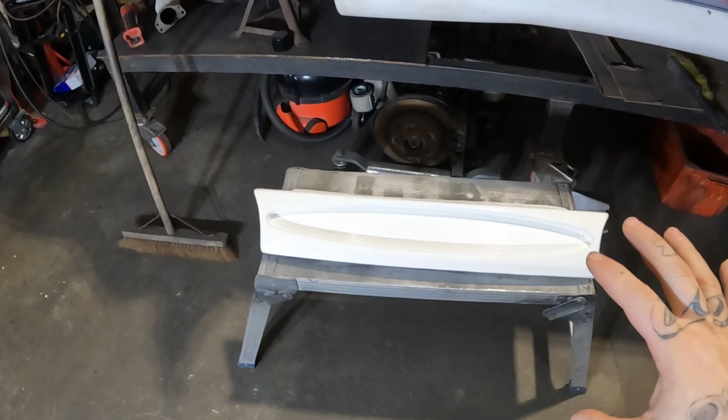But however, this episode isn't about that. This is about me trying to turn all of this into a rotisserie rollover jig. Have I ever built one of these before? Nope. But am I going to try? I certainly bloody am. Now I could just go for the simple approach and basically copy this one, but that would be too easy. So I figured, why not make my own thing and just start from scratch, rather than copying someone else's thing.

So the plan of action is to build something like that. So we've got our main upright, that will have a tube welded to the top of it, which in turn will have another tube passing through the centre of it, which will then have a jig very much like this, which will bolt to the car, thus giving us the ability to roll the car over.

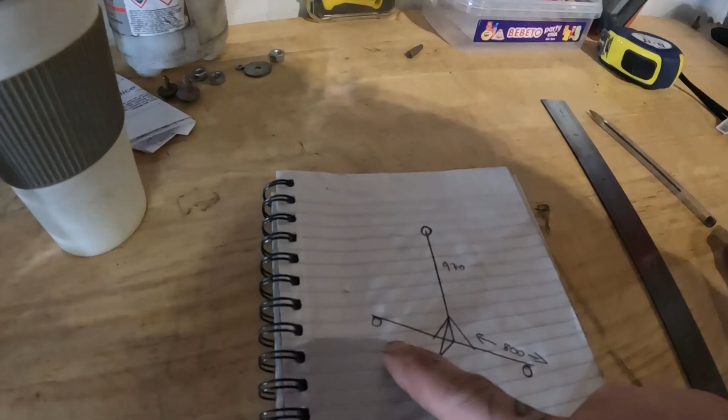And then on the bottom we'll have a straight bit of box section going that way, a straight bit of box section going out in towards the car, and then at some point I need to put casters on it as well so I can roll it around, and then obviously chuck a bit of bracing in just so this doesn't want to fall over and what have you. But yeah, once we've done that, we can then roll this car over and see the true extent of the rot on this thing.

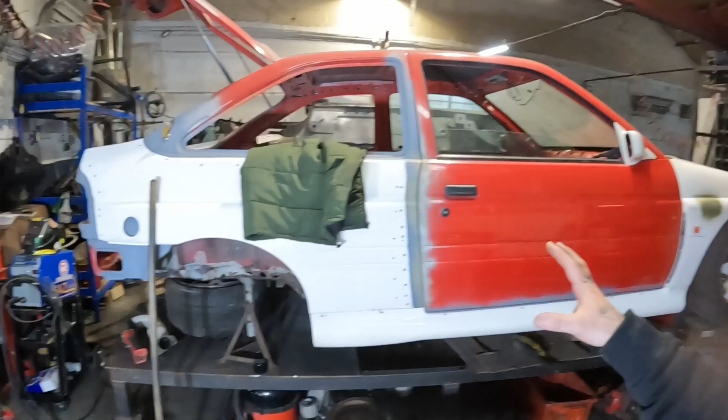Now if you're new to the channel and wanting to watch a geezer build a rollover jig has brought you here, this is my RS2000. I bought this thing sight unseen off the internet, usual story, and it's turned out to be an absolute turd of a car. So we've already attacked a hell of a lot on this rust wise, but I need to get this thing rolled over so we can assess the bottom of it before I decide whether or not I'm going to tube chassis it, because there's a lot of money and time involved in doing a tube chassis on a car. So I need to see exactly what's going on with the bottom of this thing.

So yeah, we've got all of this scrap metal down here, offcuts of random shapes and sizes, and hopefully we can make something out of all of this. And then we've got a bit of 2mm plate over here, which I'm going to make a circle with, loads of holes in it, and then we can put a pin through that to hold the car at various angles like my other car is currently. So yeah, stay tuned. Hopefully this won't end in tears with my car being on the floor where my rollover jig hasn't worked and it's just fallen over, but we shall see. Let's go on with it.

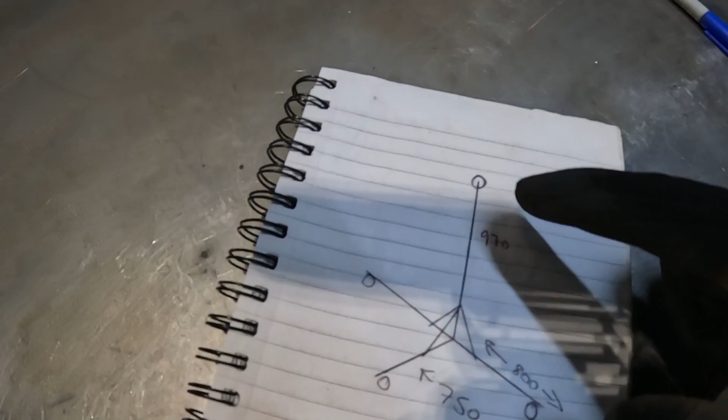Step one of the master plan then, folks. Now this upright bit I have already got done, and it's already been notched for the tube to sit in it, so I don't need to worry about that. That is 970 from the bottom of this piece to the centre of where the tube's going to lie, virtually. So what we need to do now is cut this piece to go across here. I'm making that 800 because I've got this one here and that only measures in at 850, and I've never had any issues with the car seeming like it wants to fall over as you're trying to tip it. So I think 800 is more than adequate for that.

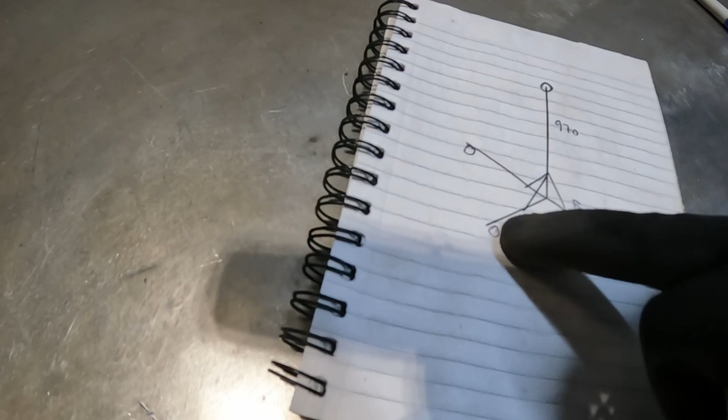And then the bit going out towards the inside of the car, so the bit that comes from there and goes under the car, is going to be 750. Now I have got plans to have a tube going from this side to the other side, so it will hold the two jigs together basically, stop them wanting to fall apart. So we've got our bits of metal here, we'll measure them out, get the saw out from down there, and we'll get to cutting.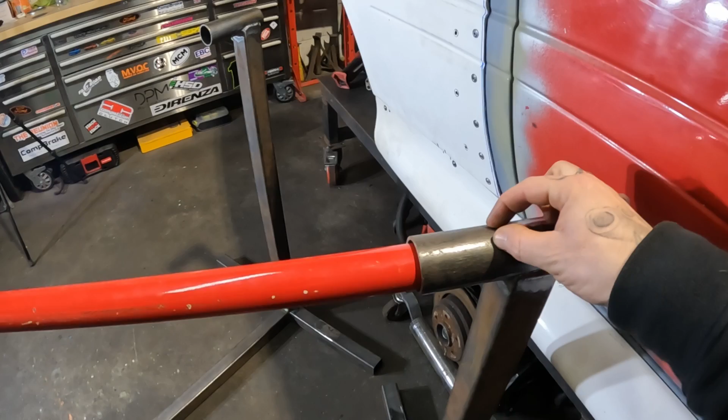Just to show you what I was on about earlier, what we're going to do is basically chuck a slightly smaller diameter pipe through that main pipe, and then the plan is I'm going to drill a couple of holes in this main tube, weld a couple of nuts to that, and then we will bolt through that to pinch on this pipe, which will then stop it wanting to turn and yada yada yada.

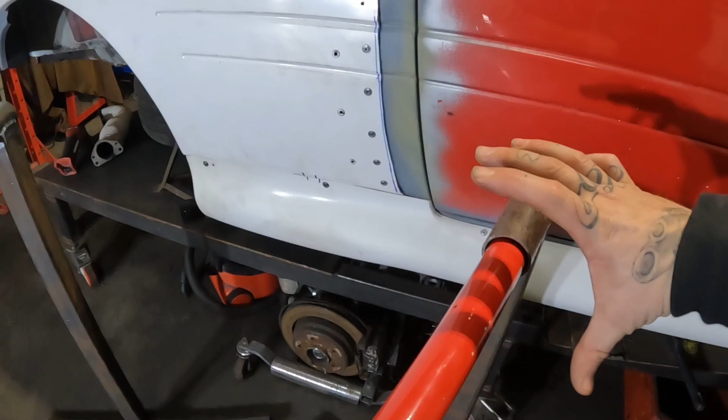But what we're also going to do is cut a big 6-inch diameter round plate, and then we're going to drill multiple holes around that plate, so when we put a bolt on the side of here, we can then push it through one of said many multiple holes, which will also work towards helping that stay in the position that you want your car in, whether that be 90 degree, 45 degree, blah blah blah. But that is a little bit later down the line.

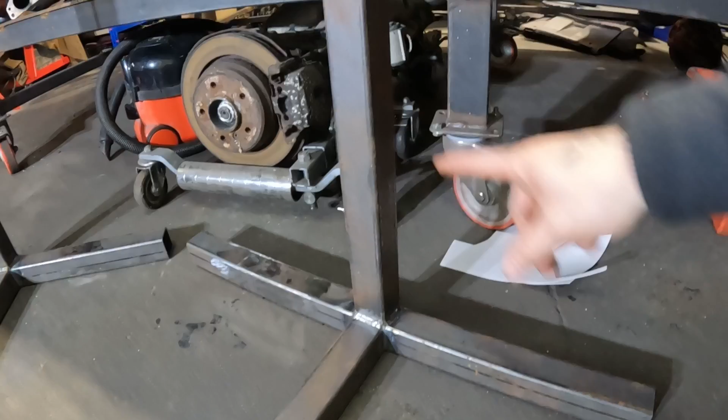What we need to do tomorrow, because it is getting on a bit now and I don't like welding in the workshop too late, is we're going to put a brace in from here to here, just to stop that wanting to twist and whatnot. And then we're going to chuck in a couple of diagonals on here, so we'll go from this main upright to here, again from there to there, and the same again on that side, and do all the same again on that other one. And we will be using some 40 by 40 with a 2mm wall, so that'll be plenty strong enough for that. It'll triangulate everything down there and job is good.

So yeah, stay tuned. I'll pick you guys back up tomorrow when we're ready to crack on with that, and then it'll just be a case of making something to fix from that to the car, and then it'll be the moment of truth, and hopefully my car won't fall over.

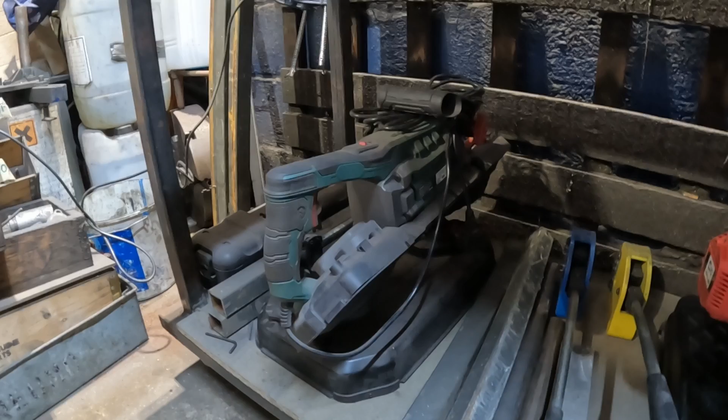That is the bracing all done and cut out. Now this little Parkside saw thing, whatever you want to call it, is absolutely brilliant. Cannot fault it, apart from when you need to try and cut a 45 on one of them and it doesn't quite like it, so we had to bust out the big guns. Thankfully I bought this a couple of years ago to use for actually building my welding table, so that's quite handy. But we're there, we're all cut out, we're all ready to go now.

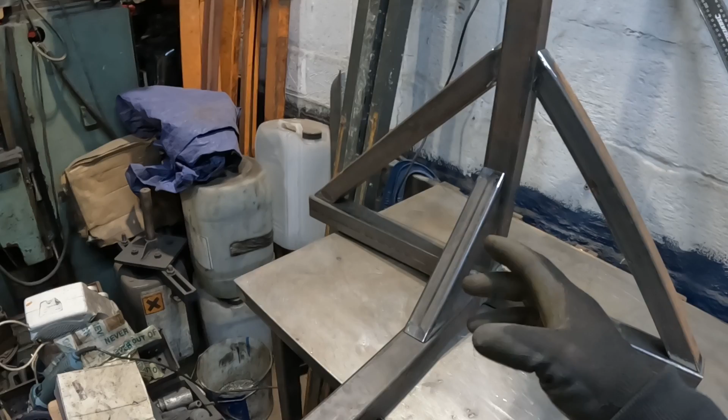As you'll notice, the piece I've got from the main upright to the piece that's going to go underneath the car, I have cut quite a bit shorter. Now that is because I'm worried that when I go to spin the car, if I had a longer piece in, the car might hit it. So I've made that quite a bit shorter. It'll still brace it, it'll still hold it, so that's fine and dandy. But yeah, that's all of that.

And then we've got a couple of smaller pieces. I do still need to notch these ever so slightly to fit around the tube a bit better. But that will go up in there like that, and then that will brace that tube. So everything's going to be braced, everything's going to be supported in some way, shape or form. What we need to do now is fire up the welder, tack that in place, and then fully weld it in place, and then we're good to go. Move on to the next phase.

But what I've also done is I went to Homebase earlier and bought one of these furniture dolly things, because it actually worked out cheaper to buy one of these built like this than buying 4 separate caster wheels. I could only buy the one because they only had one in stock today, but I'll go back tomorrow and get another one, and then I should have all the wheels that I need to get this thing rolling. So weld up, let's get cracking.

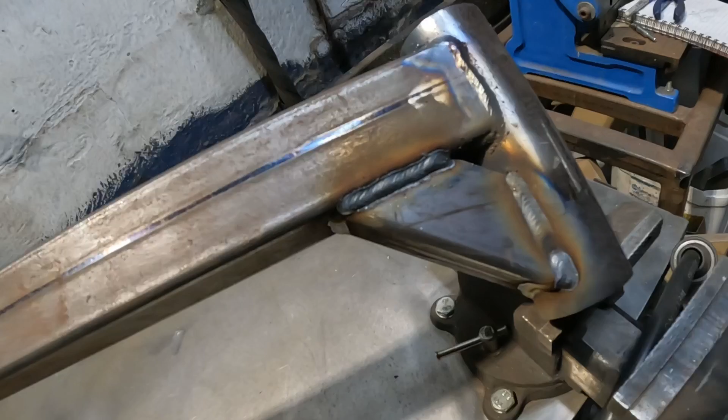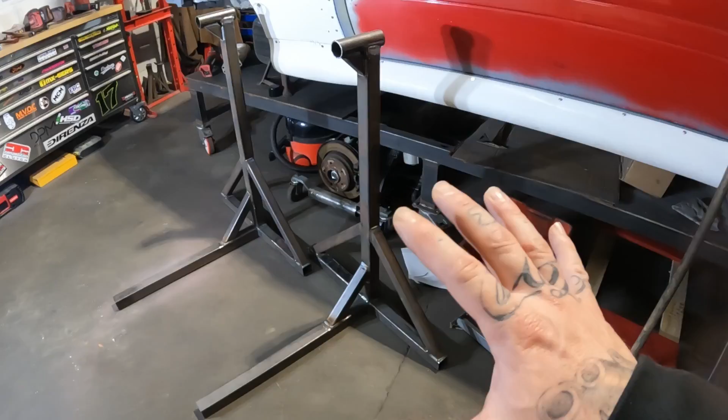That's the frames fully braced out now, fully welded and all that stuff. So they're pretty much done at this point, with the exception of welding on a couple of nuts to the top and then some sort of latch mechanism, if you like, for one of these. And then of course putting the wheels on, which are down there. But for the most part, that is done. What we need to work on now is that support bar that goes up there.

So there's a tube that's welded to that, which goes through and into that tube. So we need a tube coming out of there, a big bar going across, which I'm gonna probably do at about 1.2 meters, just so it's more or less the width of the car. And then from that, we will then work off to get onto the car. So that is the plan.

Let me just go and get some metal drawn out across the table, and then I'll show you exactly what I mean, because that might not have made any sense whatsoever. So let's get my box section down on the bench, we'll mark it all out, cut some of that to length, and then I'll pick you back up when I'm ready to show you what I'm on about.

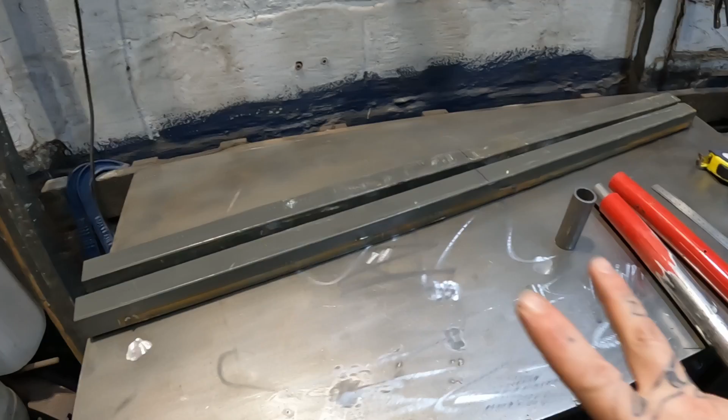Alrighty then, we have got some bits cut out, folks. Those are my 2 bits of 40 by 40 box section that I've cut to 1200mm. I've marked 600 centres because I need to drill a hole through here, which will then have that pass through at some point. What we need to do is weld those 2 bits to the bigger red bits. The reason being is that I can't hole saw the red bit through the 40 by 40 because there'll literally be no meat left on the 40 by 40.

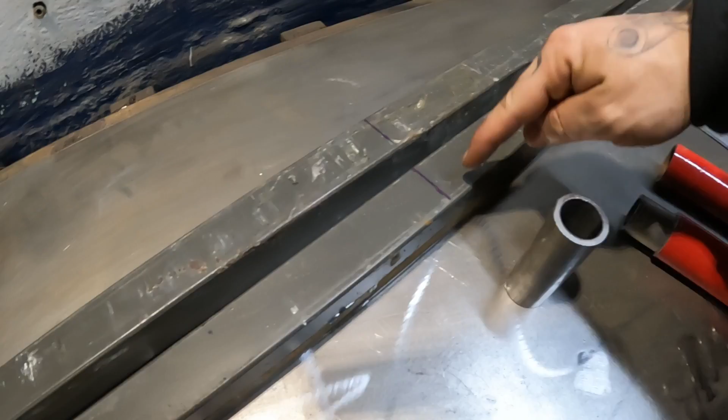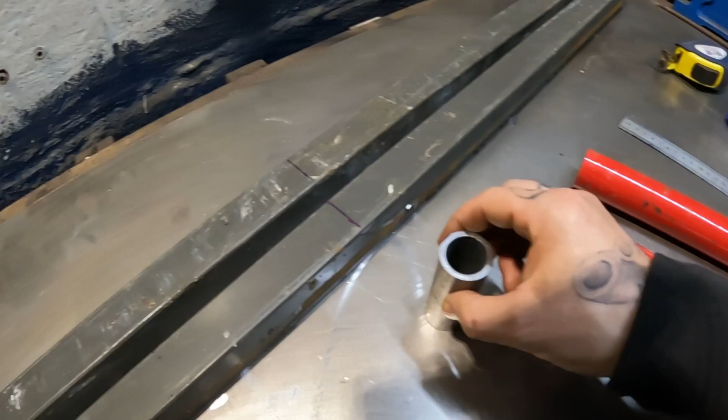So we'll drill a smaller hole, we'll weld these 2 bits to the red bits, pass them through, weld the underside, and then also weld round the red bit to this as well. So it'll be fully welded both sides, and that'll be fully secure into the other tube. So that's my thinking. Hopefully that will work. In my head that's going to work perfectly fine, but we shall see. So I'll get my little pillar drill thing made up on here, we'll get everything sorted out, and then we'll start drilling some holes and then start welding some stuff together.

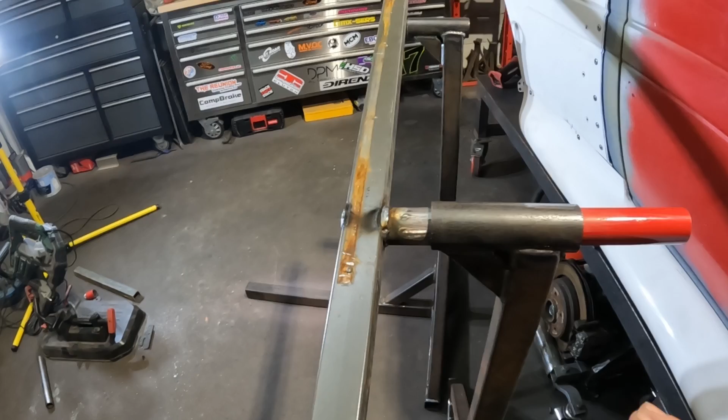Well, I'm going to go as far as saying that has come out pretty bloody spot on. Happy with that. However, the next one isn't going to be as plain sailing. As I explained earlier, I need to make a big circle with multiple holes all the way around it. So once I fix a pin to here, I've got somewhere for that pin to slot in and hold this in whatever angle I've desired at that given moment in time.

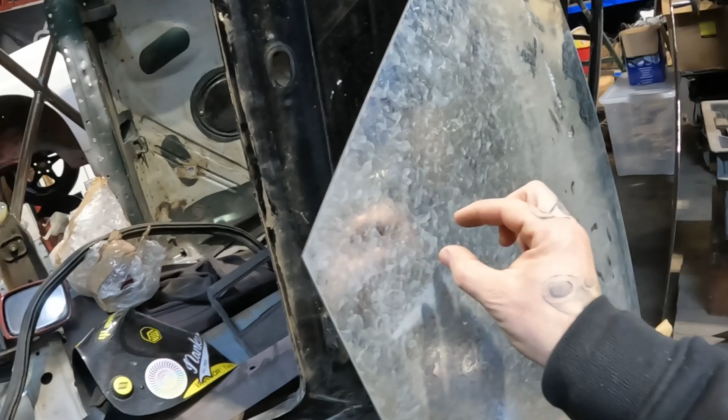So, what we need to do is head back to the bench, and I think we've got some, it's either 2 or 3 mil galv still. It's not ideal, but I'm trying to do this thing on the cheap, and that is free, so we might as well use it. So yeah, as I explained earlier, we need to do a big 6-inch circle, 30 mil hole through the centre so it slots over our bit of pipe, and then multiple holes all the way around it for the pin to go through. And then we shall weld it to this, slide it through there, weld it to that as well, and again weld the back end where this protrudes past.

So all in all, it's going pretty well, and so far it's cost me absolutely sod all other than, well, MIG wire and a bit of gas. So happy days so far.

Right, I'm gonna have a quick coffee break because I feel like I deserve one, and I'll pick you guys back up in a minute.

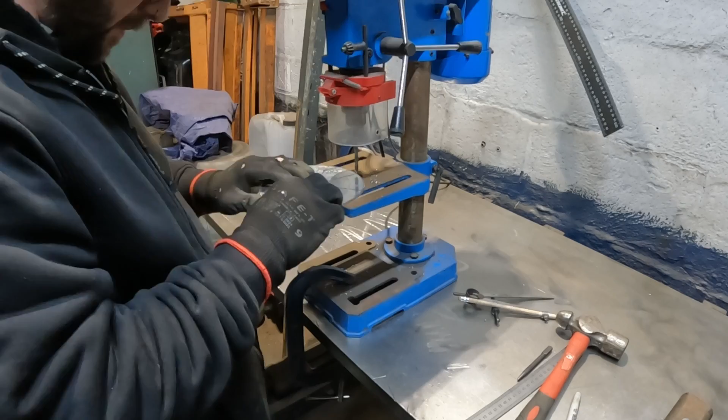Well, that probably took a couple of minutes at most for you guys, but for me that took an absolute lifetime. It's actually quite difficult trying to cut a circle out of steel and then shaping it and then drilling it and blah blah blah. So that is done. All the holes are drilled. I have left myself scope for drilling extras should I need to in the future.

So that is that. What I've also done is drilled a couple of extra holes in the box section, because obviously when you lay this over that, like so, 2 of the holes would have been covered up by the box. So I've drilled them out, so that's all happy days. So now what we need to do is pop that bit through there, like that.

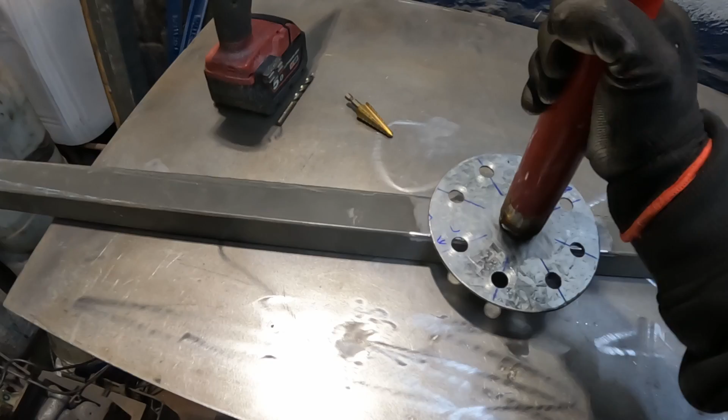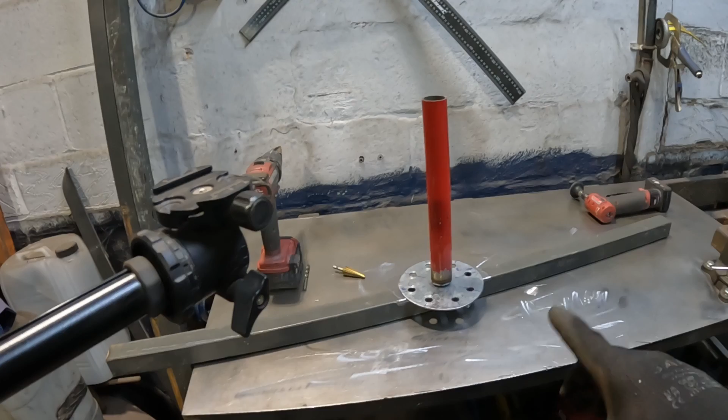So now that's in there, what we need to do is weld the tube to the plate to the box, and then we need to weld the underside of the tube to the box as well. And then in theory that should be decently strong then, and hopefully we shouldn't have any issues. So let's put you back on the tripod. We'll bust the welder back out, weld all this together, and then we can move on to the next bit, fixing the car to it.

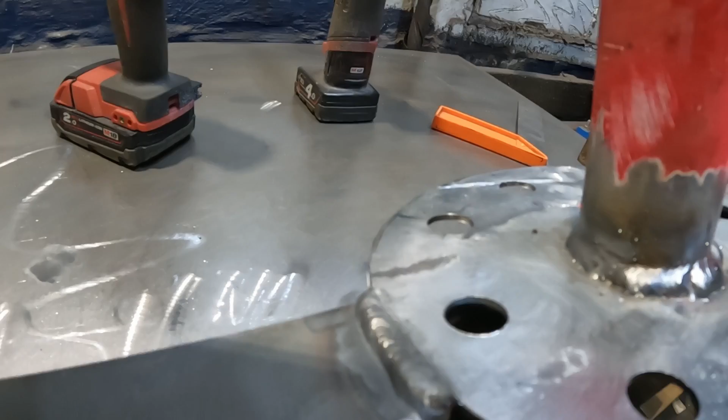That was my first time welding galv, and I was completely unaware that it's not very nice to weld. These bits came out alright because I tuned in my settings a little bit, but when I started on the tube, I mean look at the state of that. I ended up having to lay a huge slug of a weld around that bad boy. But like I say, once I tuned in my settings, the rest of it all went pretty well.

But the amount of white powder that's come off of that is absolutely everywhere. Probably a bit toxic though, really, isn't it? I should have worn a mask, really. Oh, right, let's go and put this in the jig. And what I meant by car was jig. Look at that. Happy, happy days.

So like I say, I need to put something on the side here to then have a pin to go through and through into them holes. So I'll have to work on that at some point. Also need to weld the nuts on there to put some pinch bolts through. But yeah man, that's looking pretty good. Pretty stoked with that, to be honest.

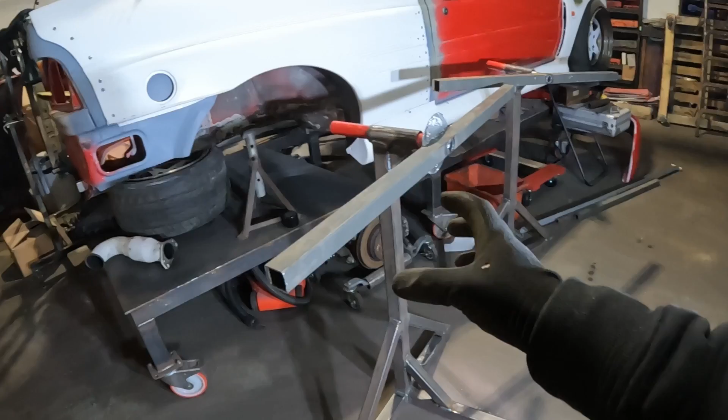So yeah, we'll get onto that next. We'll sort them out, sort the mount out for the pin or bolt, which is what I'm going to use. And then we'll move on to making the structure that will go from this to the car. But that is a job for another day because it's super late and I'm going to go home. So I'll pick you guys up next time back down there.

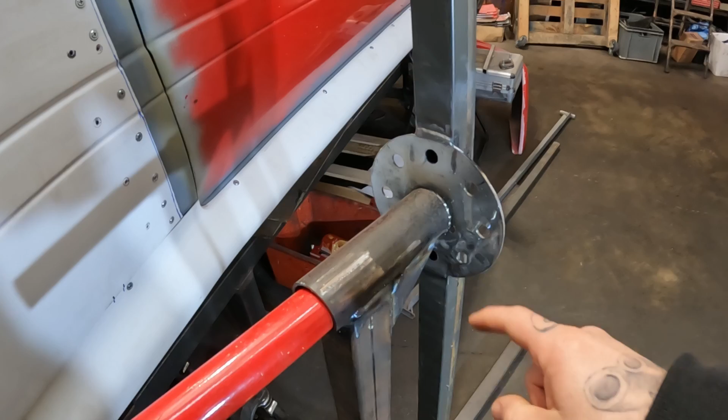Okay then folks, so next on the agenda is going to be making my sort of locking mechanism, if you like, which is going to consist of one of those going on there. Obviously where I'll put that little mark there, that will be a hole for a bolt to go through, so that one will go there, and then we've got another one to go on there.

So we'll go over to the bench, we'll start cutting this out. I've got some like 2 or 3 mil plate I think to cut these out of, so it should be sturdy enough. So yeah, let's get over to the bench, cut them out, and then we'll get them welded on, and then we'll move on to the next phase.

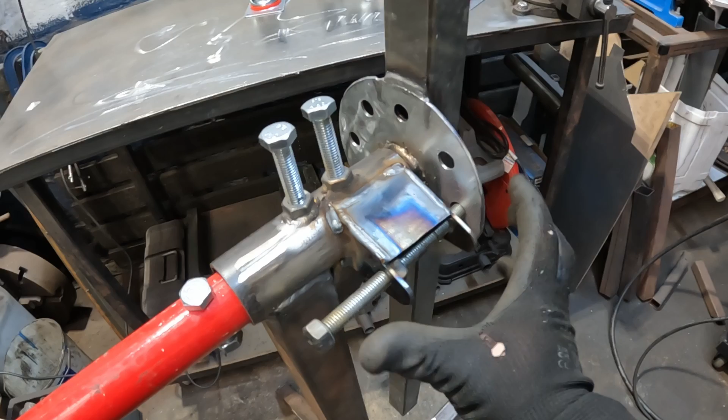So this is all fully done. I've now put a brace on here as well, just to stop these wanting to splay apart. Not that I think they would have anyway. And then as you can see, managed to get both my bolts in the top, and not very well lined up. But that is just there to serve a purpose and pinch this pipe, so I'm not really fussed about the looks. Another bolt through here just to stop this wanting to go through that way and fall out.

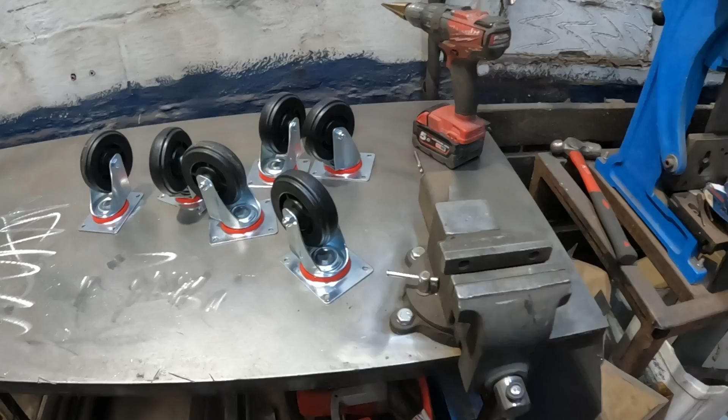And then with this bit here, as you can see, just wind it up, get it through the hole, and then that also just stops it from wanting to turn over on its own if these aren't fully clamped down. So yeah, next step is going to be welding these caster wheels on so we can move this thing around easily. So I've got one for each end. We'll get all them welded in, and then we can move on to finally making the structure that's going to bolt to the car.

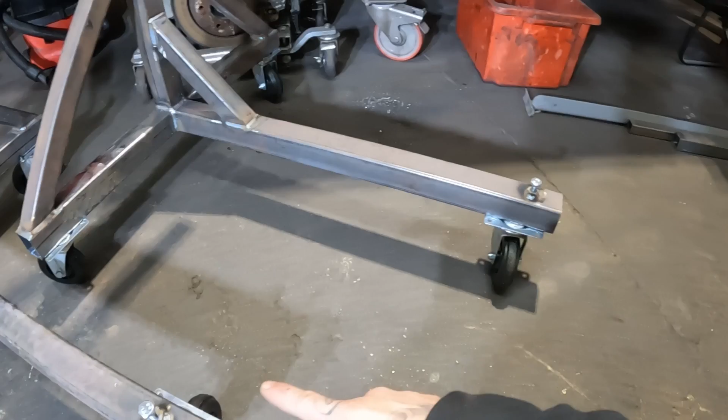And there we have it, two fully movable rollover jig ends. Look at that. I'll knock the other side out off camera. I didn't see the point in showing you me welding all that up. But what I have done also off camera is just welded in a couple of nuts on each leg, so when I've got the steel tube going in there to join the two together, I can pinch it tight and then I know they're not going to separate.

Welded a nut on here with a bolt in it, again to stop this wanting to turn around, and put a nut and bolt through there to stop it wanting to fall out. But that is as far as we can go with that for now, because the next step is going to be making the jig ends that go on that and attach to the car. But what I want to do is get this grille fitted in the car first, because once I've got that bumper off and a bit of framework attached to the car, I'm not going to be able to get the bumper back on and see how all this looks.

So what we need to do is get that in there. However, we need to do some trimming. So we need to trim the bumper on each end there and there, and we're probably going to have to take out a bit of the actual car slam panel there as well, just so that this can nestle right down and go where it needs to go. So let's get some tools out, we'll start trimming that down, and then once we've done that, we can move on to making the frame to attach this to that, and hopefully get this car off the table, flip it over and see what other rust we've got underneath it. I'm dreading it, absolutely dreading it. Right, let's get some tools on the go.

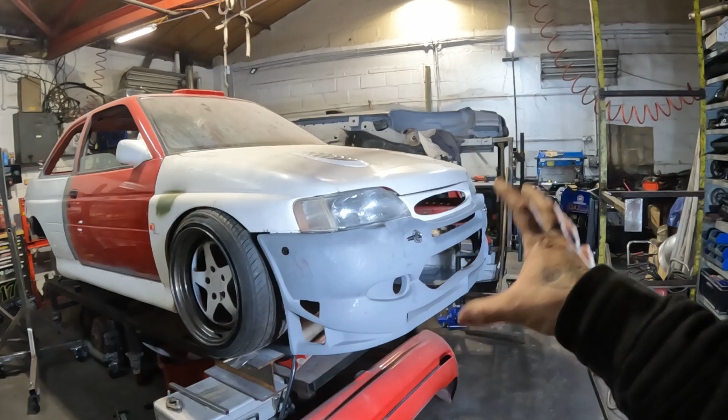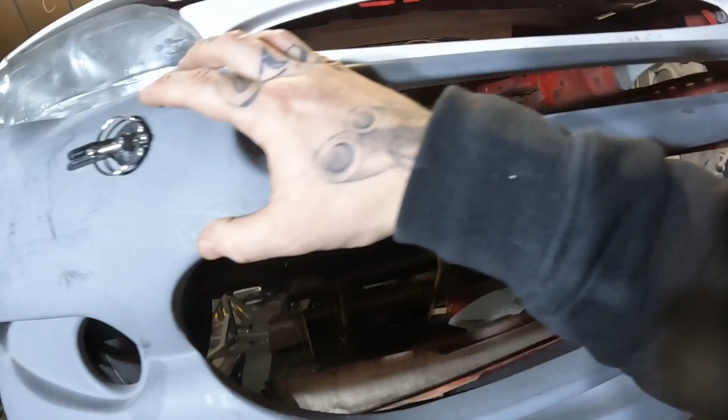But right, leave it with me. I'm going to take all this back off, and then what we're going to do is start making the structure to go from that to the rotisserie, which is going to be using some of this 2mm plate I have here. I'm going to go off the mounting point here and here, and then I'll show you what I'm on about when we get there. So give me a minute, I'll peel all this off. And just like that, it's back to looking sorry for itself again. Oh no. Right, what's the plan of attack then?

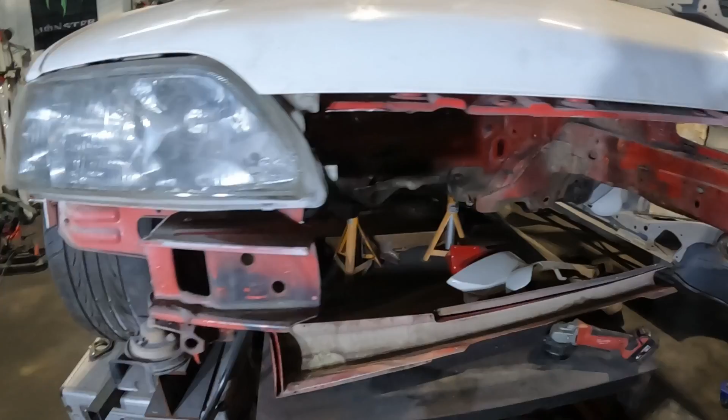So we've got some plate down here. This is about 3mm thick. So what we're going to do is cut a section out to go in here and protrude over slightly. Same again that side, and we'll bolt that in place. And then what we'll do is cut a bit of this to go between the two ends. And then that will fully brace the front of the car together, and then we'll weld another bit of 40x40 off the side of this, aiming upwards, which will then attach to the jig.

And it's going to be very much the same deal for the back as well. So we'll make a couple of plates for the back, put a brace across, just like so, and then that way all we've got to do is run a couple of chutes upwards off of that to pick up on the jig. So yeah, right, let's measure some stuff out, we'll get some cutting done and weld some stuff together again.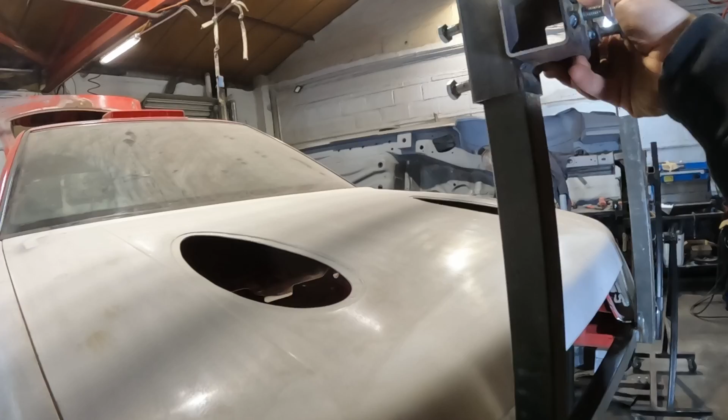So this goes on here like so, a couple of bolts in that one to act as pinch bolts, and then this piece is obviously going on the horizontal, which will pick up on that side, which is down there somewhere, and then again pinch them up, and then this in theory is completely height adjustable and side to side adjustable, so we should be able to get the pivot absolutely perfect. But that is now done for the front, so what we need to do is move on to the back.

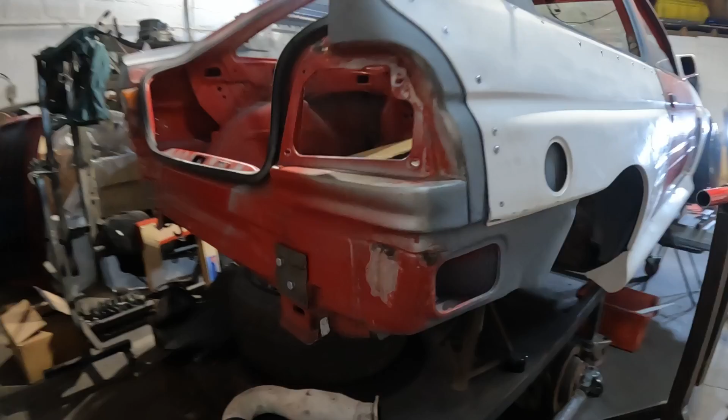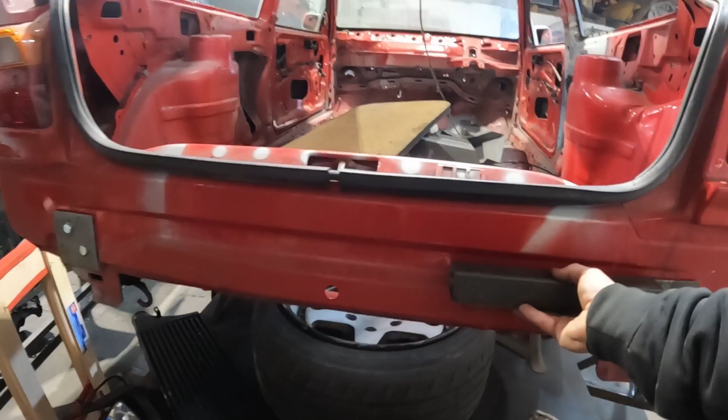So I have already been ahead and cut out some plates, got them bolted to the car. This side I can't do a bar straight across like I did on the other side, because I need to come out a little bit. So plan of action is to cut off maybe 3 inches or so of box, weld that to the plate, and then weld a bar to the end of that, go straight across, pick up on the other side, and then we'll have some uprights on that as well, so we can do the same deal as what we've done on the front and make everything quite adjustable. And then they will obviously go straight on them, and we should be good.

So hopefully we should be able to get the pivot absolutely spot on and stop it being top or bottom heavy. That's the plan at least. Hopefully it'll work out. It was a bit of a challenge trying to get the other car to pivot right, but yeah, that is that. But it is now super late, it's super cold, so I'm going to put you guys down for tonight, and I'll pick you back up tomorrow when I'm ready to crack on and get the back bit done.

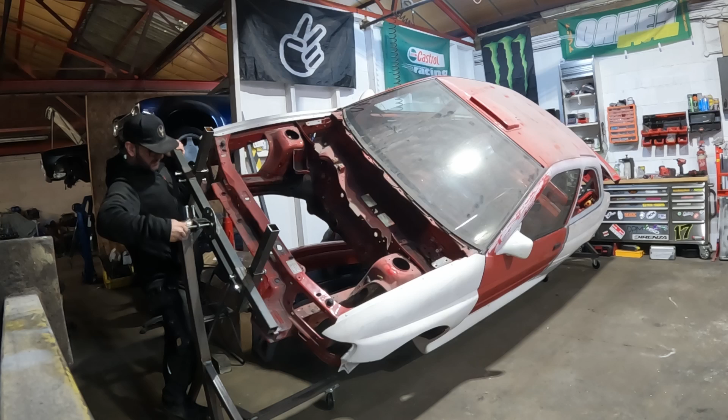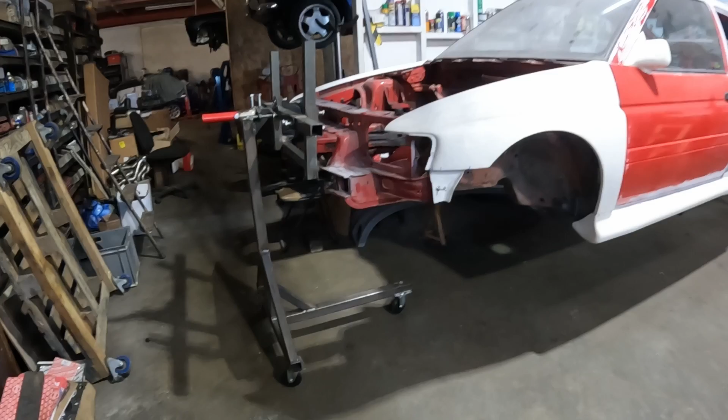Bar on there, folks, and it hasn't fallen off. I'm made up with that. It is so solid, so solid. But I won't lie to you, I was nervous as you like putting this on there. I mean, I was nervous when I put this car on this rotisserie, but knowing that I'd built this one, a whole new level of nervousness. I won't lie.

But for anyone that's interested and wants to know, this whole setup here that I've made has cost me about £120, just for like nuts and bolts and the odd bit of box section, and obviously the wheels. The wheels were actually the most expensive bit, but I even managed to get them on a discount because I bought one of those furniture moving dolly things from Homebase. So if you need wheels for something like this, it's cheaper to buy 2 of them than it is to buy 6 wheels by about 30 quid. So that's a saving there as well.

But if you need to build one of these, go down to your local scrapyard like I did, ask them what they've got, and you might be able to get a deal. No harm in trying. But yeah, like I say, £120 and we're done. And I am made up. Hopefully this video has gone some way into helping someone that might be wanting to do this themselves. Hopefully it's been insightful. I don't know, you have to let me know in the comments, but yeah, I'm happy with that. Happy as Larry.

So yeah, that is going to be it for this one, folks, I'm afraid. Hopefully you guys will join me for the next video where we're going to turn this thing over on its side and see what the underside's like. I'm praying that it's going to be decent, because getting involved in a tube chassis on this is not only time consuming, but it's very, very costly as well. And time and money is something I don't have an abundance of, so yeah, let's hope for the best for this. And then hopefully we can get that rear end squared in there and make a start on the rear wheel drive conversion shortly.